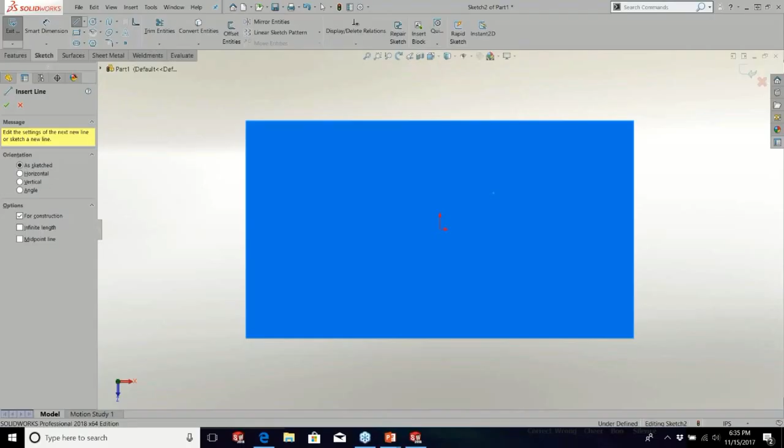A is for almost anything. And this one goes out to my group, SWOG1. All right, let's jump right in.

All right, very simple sketching, everybody should know this. About it, so I'm like, well, wait a minute, let's make sure that people know: the A key is an arc when you're sketching. Everybody should know that, but there's some that don't.

The A key is pretty versatile, that's not all it does. If you have selections that have multiple choices, the A key will toggle. If you look at the property manager, the A key will toggle through your options. So if you have a slot, you can toggle through all these. The other thing that I really like, because I like to focus on the pointer, is that the pointer icon updates to show which one you're looking at. So A is a command toggle.

Next one's going out, Swords for 200, Alex, that's S words. This one's going out to SolidFacts. They are actually the 3rd SolidWorks user group to hit the 20-year mark. They just did that not too long ago. Big ups to Duncan Gillis and all the guys down under.

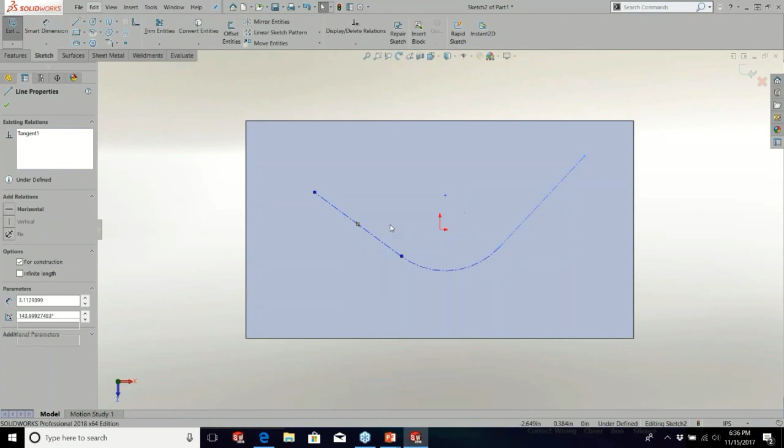Everybody should know about the S key pop-up. This is probably one of the best tools in my opinion. Let me knock this out. I add my extrude and my cut to the S key because that's usually how I exit a sketch.

Little bit of side trivia for you here: how do you turn an extrude into a cut? Grab it, watch the feature manager - turns into a cut, it's an extrude, it's a cut, it's an extrude.

Now the thing most people don't pay attention to with the S key - you hit the S key, you get the pop-up, but it also activates the command search. So you type in a command, it brings up that command. If you click right here, it'll take you right to the command. If you click on the eye, it will show you how to get to the command.

And this was something that I just found out last week, and I think he's there in Waltham - thank you, Kevin Burney. You can drag this over to your... no, Kevin told me something else, this was a Jim Wilkinson trick. You can drag this over to your toolbar and add it. If you want to know where it's at, the arrow moves over, does the fly out, goes to the command. When you just click your mouse, there it is. I'm going to keep moving fairly quick here.

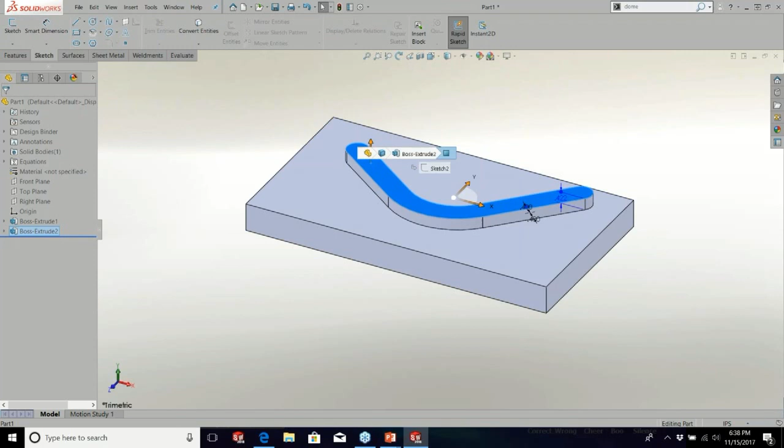All right, what does D do? Well, if you look up in the top left corner is breadcrumbs. Not your Hansel and Gretel breadcrumbs. These are powerful tools. When you hit D, it brings them right to your pointer. So your part, your body, your feature, you can edit your sketch. Everything you need is right there at your cursor. It also brings confirmation corner to your cursor. So if you think about it this way, it brings the top left of the screen and the top right of your screen to your cursor.

It's a very slick tool for a part, but it really takes on a new level when you open an assembly, because when you hit the D key in an assembly, it brings up the parts, but it also brings up the mates. So say you want to lock rotation on that, it's just a right click on the mate. You can make your change right there.

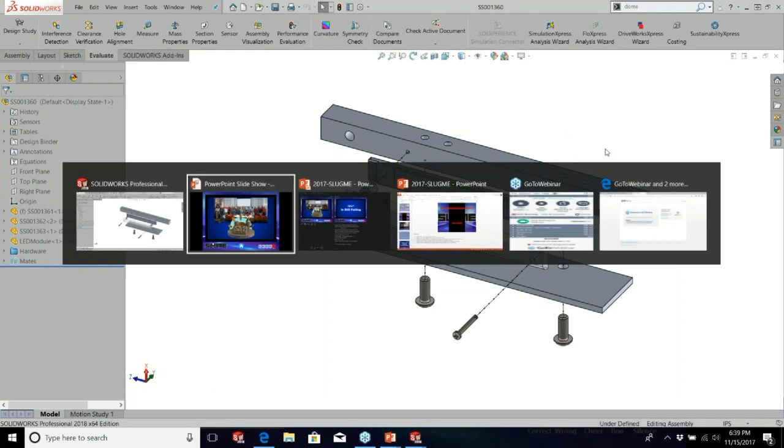Really quick shortcut. A lot of these came from when I'd be showing something else and people would always get hung up on the little things and say, hey, back up, how did you do that? Well, it was just something that I assumed everybody knew.

F also stands for frying, and what do we like to fry at SolidWorks? Bacon. This one goes out to James Adkins' group in North Carolina.

Now, James might think that he's getting a little bit ripped off here because the big thing with the F key is it zooms to full screen, which is cool, but that's not all it does. And this is kind of the bridge in this. It's like a bridge in a song. It'll take us to the next one.

Shift of control. Just really quick, Dan, do I have serious lag? No, you're pretty good here. Okay, perfect. Yeah, I just thought there was a little bit of delay.

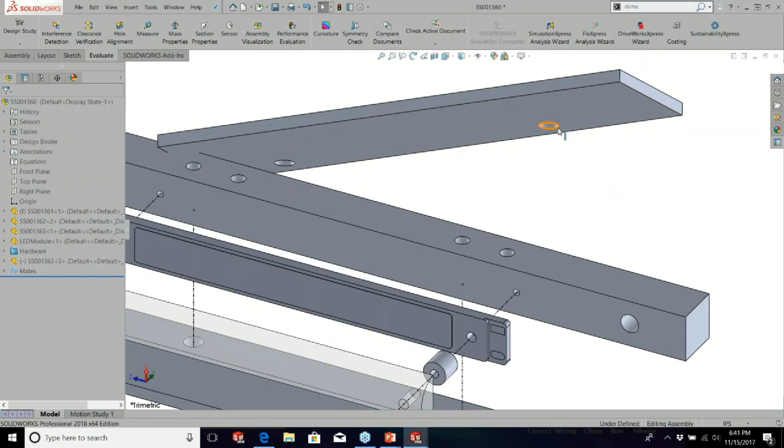And if you hold down Control and drag a part, most people should know this, but I still find people that don't, it copies the part. Right click to rotate it. Alt key enables your smart mates. Drop that in there. Alt key on this, drop that in there. I've copied a part and fully mated it with a couple of clicks and a couple of modifiers.

One of my favorites that I forgot about until I went to a rollout a couple of years ago, I thought this was the coolest thing and I didn't use it, so I forgot it. Tab key, when you're in an assembly, makes the parts go away so you can drill down to what you're working on. Now to bring it back, this is context sensitive, it depends on where your cursor's at. Shift tab brings it back. But if you don't know where they're at, Control Shift tab brings everything up, and you can just click on the part to bring it back.

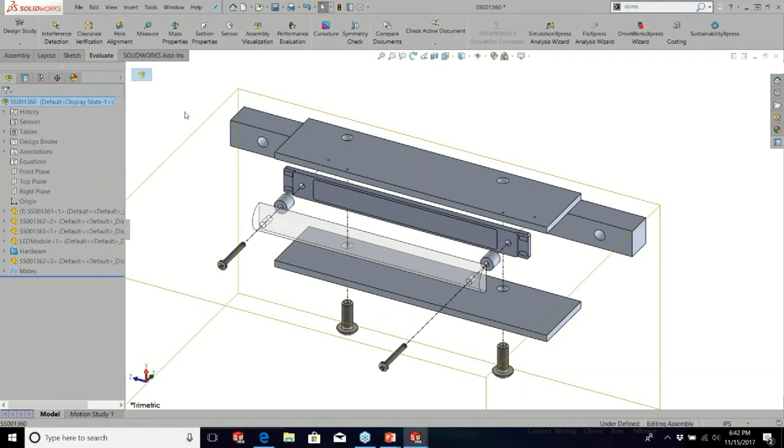So modifiers, Shift, Alt, Control, Tab, all of these. The C key, for example, very simple, but it's got a lot of power to it. If you ever have your feature manager tree blow out like this when you're working on something, Shift C collapses it, Control C copies, Alt C switches between construction geometry, Control Shift C copies appearance, and goes on and on. How do I know this? If you go to Customize and you go to Keyboard, you can show any key that has a keyboard or a search shortcut.

Pop to this top and sort them, and you can see all the modifiers in there: Control, Alt, Control Next, Control Shift. Just print it out, look at it, and then get in and start modifying it.

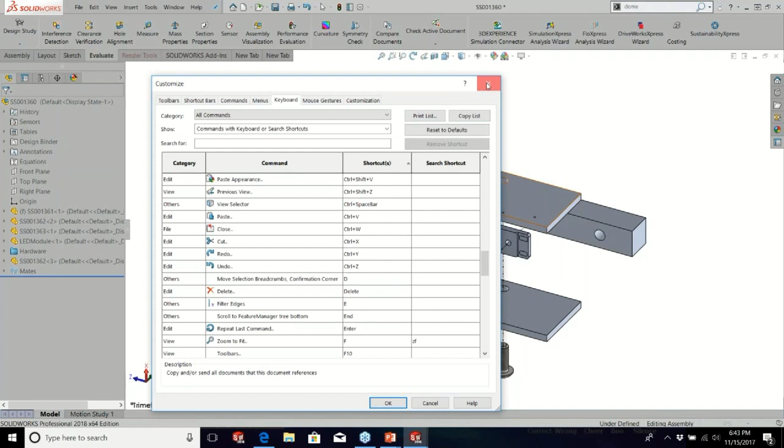I will leave you with this. Anytime I am ready to leave a part, I go through a couple of quick steps. Hold down the control key, hit 7, it zooms to full screen isometric. Hit B, that's a full rebuild, and hit S, that saves it. Just hold down Control, 7, B, S, and you're ready to exit out of the part.

Which is what I'm going to do. I'm not going to save it. And we're going to jump back. Okay.

Back to the top of the board. Totally tubular - this is a little bit manufacturing, a little bit tips. Are you going to use a saw to cut that tube? This one's going out to Sean Casebolt at the Central Texas user group. Just going to take a quick look at making a tube.

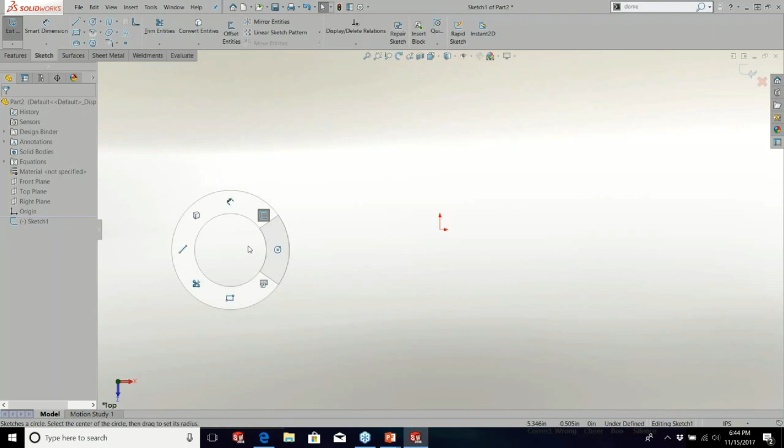For this one, I'm going to change it up a little bit. Last one I was using a lot of keyboard shortcuts, this time I'm going to use some gestures. If you're not using gestures, right click, drag your mouse, and when you swipe through it, it engages that command. Once you get used to it, it goes very quick and you won't see what's going on. So swipe over, I'm in a circle. Swipe up, I'm grabbing a dimension. And you can add your shortcut key to it.

That's something I do without thinking - if you hold down your control key and drag your middle mouse, you can pan while you're in the middle of a command. I'm going to do a thin feature, flip it, call it good. Now I'm going to do the cut.

I'm just going to do a quick sketch of a line through here. Little reminder, a lot of people forget this: when you click and drag and release, it just draws a single line segment. Hit D to exit the sketch. If you have your mouse up in the top, rolling the mouse will run you through the tabs.

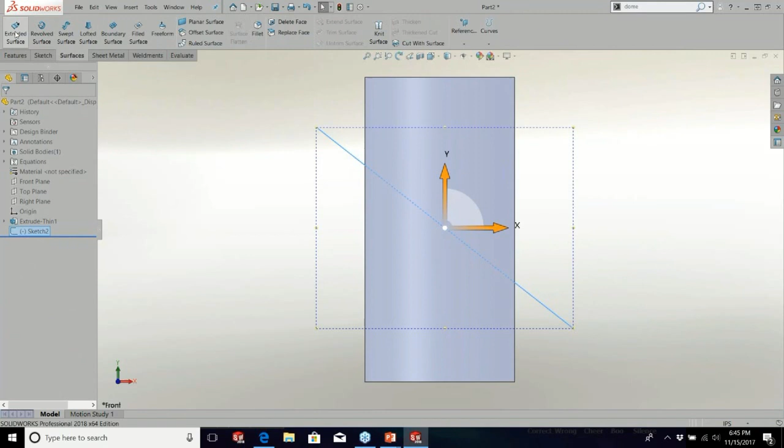So I'm just going to do a quick extruded surface, mid-plane, drag it out, right click, it's good. Cut with surface, grab that, right click, click on the surface, hide it.

I really try to get people to pay attention to the cursor because there's so much that goes on there. So just watch your cursor - there's a lot of tools. This is what we'd expect: when you saw cut something, it cuts straight through it.

Why do I bring all this up? What if you want to cut it with a laser? This one's going out to Travis and Brian down at the Slug in Louisville. If I want to turn this into a quick laser part, what I can do...

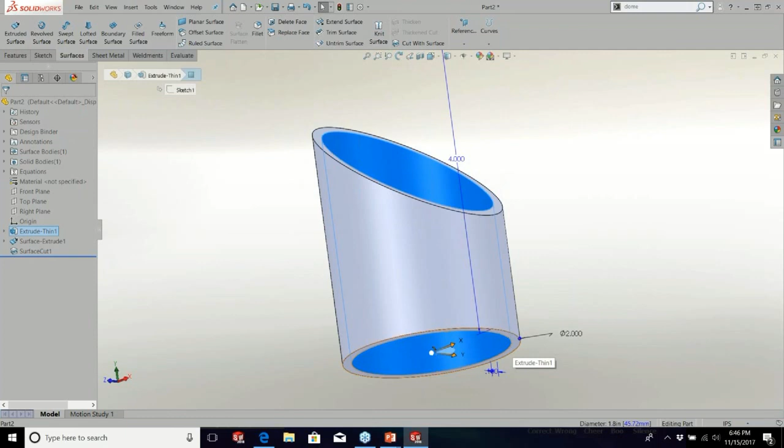Is just grab these faces. I'm going to delete the faces, hit the D key for OK. I'm going to thicken it - when it thickens normal to it.

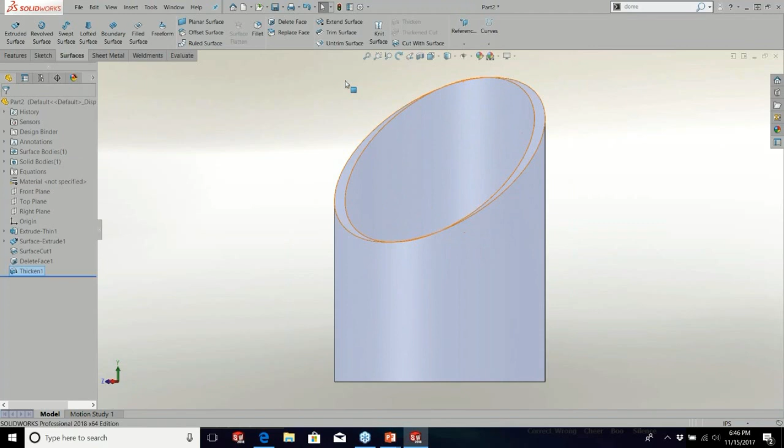So this is how a laser cuts a tube. It just cuts through one side and then the tube rotates, so you're always going to get that flat edge there. You wouldn't cut something like this on a laser, that'd just be cut on a saw, but you would cut something like this on a laser because there's no way you could cut that on a saw.

And if you're really smart, you can nest them together really nice - something you can't do with a saw.

That's a wrapped cut. How did I get the text to wrap around that cut? I used wrapped cut. This one's going out to our neighbor Jacob Huckins up with the Omaha user group. Let's take a look at wrapping this tube.

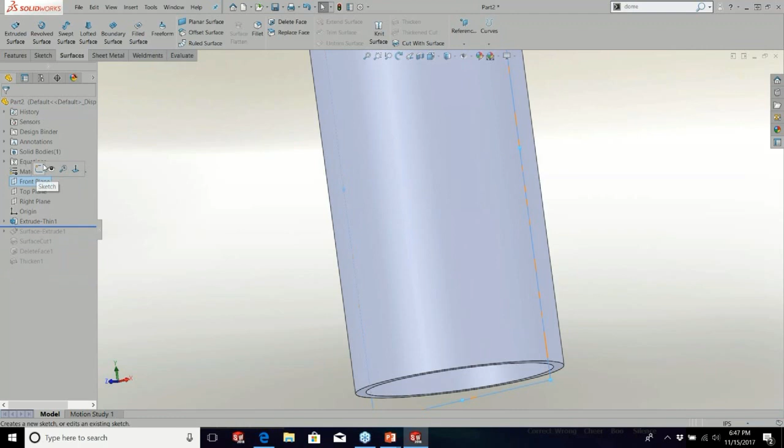Just going to do a slot and wrap it around this face. This is what it would look like if it was cut on a laser - all the edges are normal to the tube, and it looks really good.

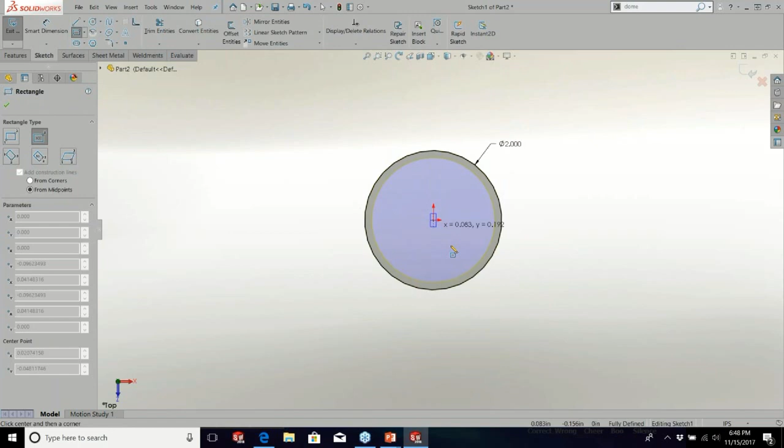First thing somebody asked me about this - oh, could we cut a square tube? Okay, I'm just going to use my breadcrumbs to edit the sketch. Draw a square, I'm going to bring it in. I'm going to take this and turn it into construction, because that way I can still use the 2 to drive the size of the square without having to add any other dimensions.

Throw some fillets on this. Say, yes, I know.

Jump out of the sketch. Now I get an error because it lost the face, since I used a different face to create that. So all I have to do is modify my wrap and pick the face, and this is what it used to look like, because it just cuts that one face. They did something really great last year.

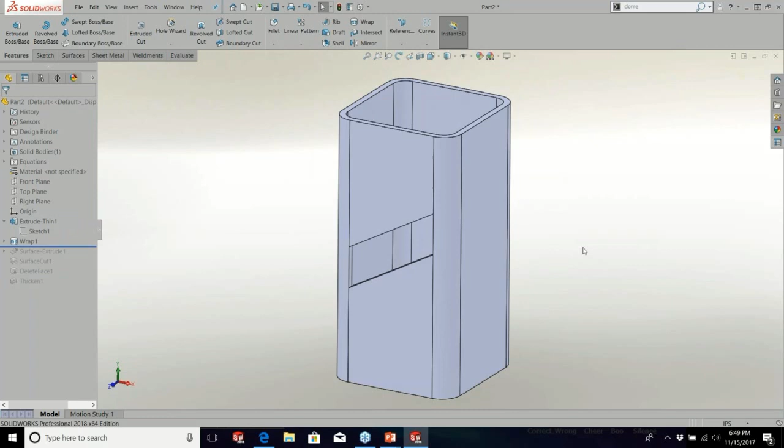You can now wrap it around a spline surface. So I can come down here, select tangency, let it wrap around, and now I've cut it. This kind of took away one of my favorite little tricks, but I'm going to show you anyway because I still really like it.

If you select that chain and do a fit spline, it'll wrap that into a single surface. You get the same message, but when you come back here, pick the surface, and it wraps it. You don't have to worry about doing it that way anymore, but I wanted to show it because it's kind of cool.

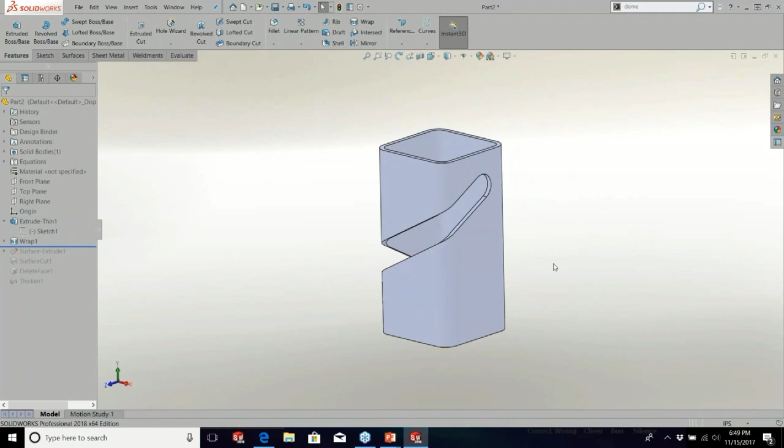All right, now we're going to flex those pipes.

This one's going out to David Antanavigi from Long Island. I joke because I had to ask him how to say his name, and he said it doesn't really matter, so I'm just going to have fun with it.

When you have a tubing laser, people want to push it to its limits, and you end up coming up with some really interesting stuff. This is something that I did on our tube laser. It's a tape cutter — you put the tape on here, it runs through the windshield and cuts on the grill.

This is what it looks like coming off of the laser, because it was just a 1x3 steel tube. And then this is what it looks like folded up, because we can set it so we can fold it after it comes off the laser. How do we do that?

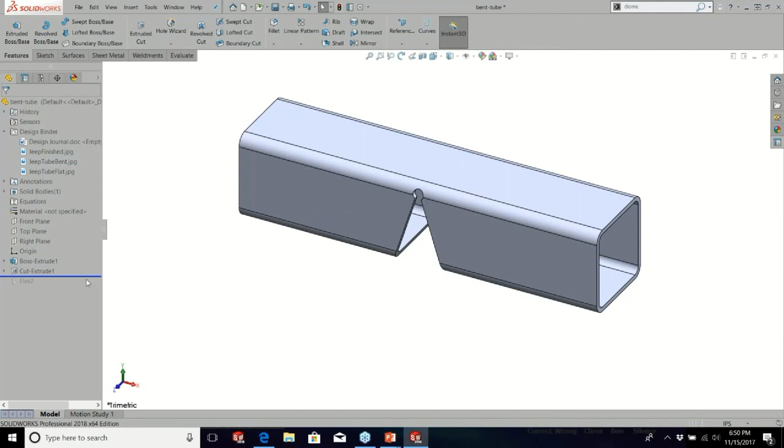Well, I drop in a cut, and then I use the flex tool to set the plane, set the angle, and bend it. I'm not going to go into this—there's a whole lot to it, but dig into the flex tool: bending, twisting, tapering, stretching, all kinds of fun. Like I said, I'm just throwing out ideas. I figure if you know that something's possible, it makes it that much easier.

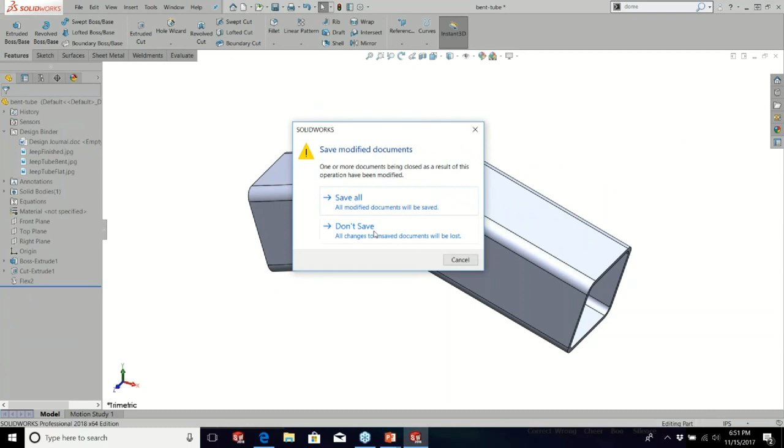Bending a sheet metal tube. This one's going out to the Aberdeen Proving Grounds, Cameron Smith.

This was a way that I kind of cheated the system. We had a tube that had notches, and what we were going to do is cut it and bend it and then weld it, and the notches are basically just alignment. Well, how did I do it? I went to my sheet metal tools, and you'll notice that I left a little gap. This is how you usually make a sheet metal tube.

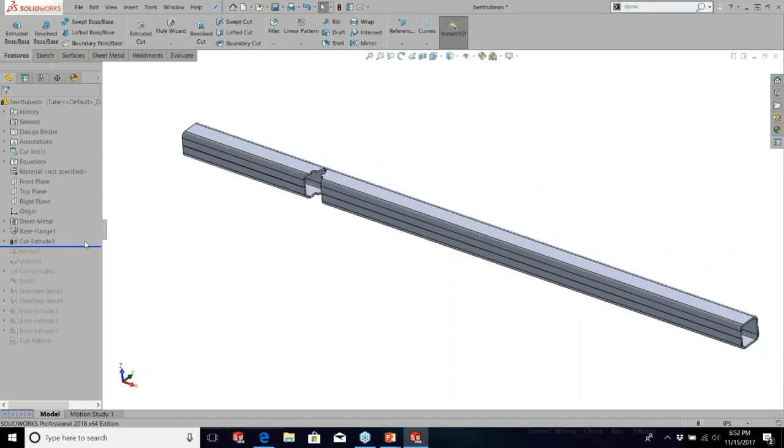Leave a little gap and it's fine. So I do a simple cut, mirror it over. I unfolded it so that I could add some reliefs — you can look in here and see the reliefs. I use the sheet metal tools to fold it back up, and then I call on my sketched bend, bring in that side, bring in that side. So it's still a sheet metal part, but then I close the gap by doing a simple little extrude.

So I get a cosmetic part. I can't flatten this anymore because I've completed the loop, but that's what configurations are for. You roll those back and you've got a flattenable part. All right.

Let's go to 'that's exactly what I weld meant.' You mean there's more? I actually saw this one on the forums the other day, and I was surprised that somebody didn't know this, but people come into it at different times. So this is why I have this, in case you forgot about something or didn't know it. This one's going out to Dan Riffle, excuse me, and Kathy Ross with the Colorado SWUG.

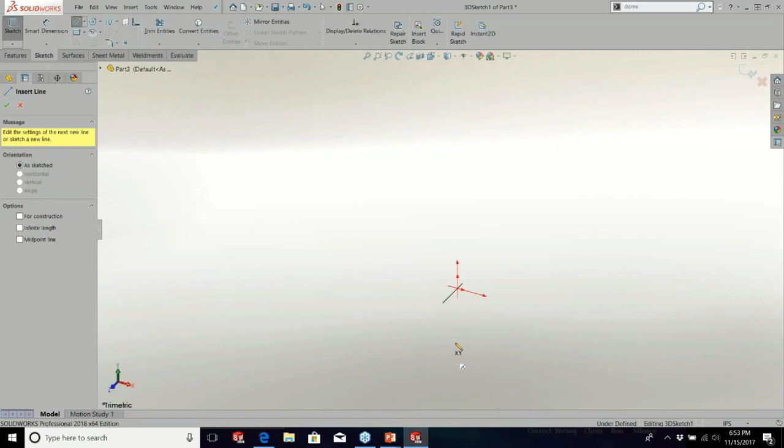I'm just going to start a new part, and I'll do a weldment sketch. I'm just going to draw a long line. Jump out of the sketch. I'm ready to add a structural member.

Now, when you install SolidWorks, you'll get about a half a dozen profiles. Each of them has different configurations and sizes, but who wouldn't want to have this many choices? You do, you just have to go get them.

So here's where you get them. Come over to your design library, SolidWorks content, pop down to weldments. Any one of these, you just hover over it, control click, it downloads a zip file, and now all of a sudden you have all of those special weldments.

What if you need a new profile? What if there's one that's not in there? Well, this one's for Tony Cantrell down in the Palmetto SWUG in South Carolina. I should probably visit him next time I visit my folks.

All right, I went online and found a nice profile that I want to use, but it was an AutoCAD file. I could just open up the DXF DWG. Here's that file. I'm going to make a weldment out of this. It's just a piece of crown molding.

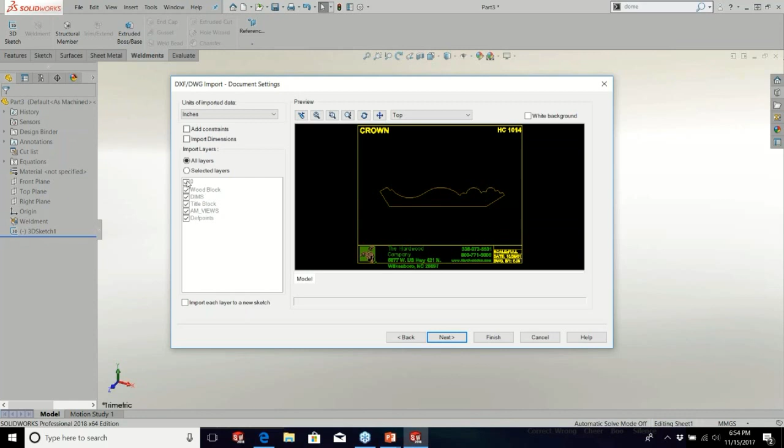First thing I'm going to do is get rid of all the extra stuff. I'm really just after this right here. Now, I did kind of cheat and peek ahead and saw that they didn't do a very good job when they drew this, so I'm going to clean up some of the gap by increasing the distance. That'll help close in where they weren't paying too close attention.

All right, here's my profile. Now to set it up for my weldment, first thing I'm going to do is select those two. When you select point, it'll give you the apparent intersection. I'm hoping everybody knows that. If you don't, you do now, you will use it. I'm going to turn this into a block, and the reason I put that intersection there is I'm going to use that as my insertion point.

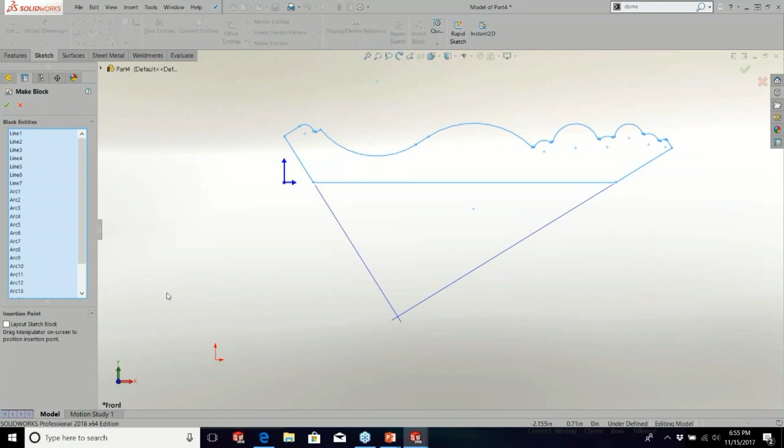Block is done. Now just to throw everybody off, I'm going to delete it because I want to bring it in and put it at the origin. And then I'm going to spin it around so it looks good. Give this a horizontal relation.

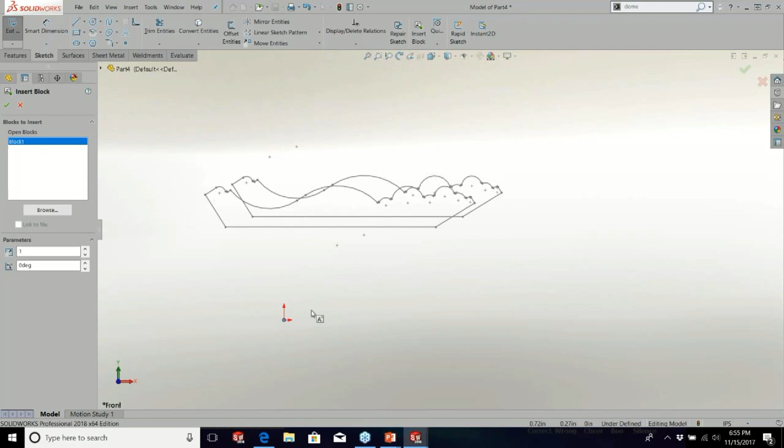And just to really mess with everybody, I'm going to explode this block. And then I'm going to come in and fix everything. There's my sketch. I'm going to close out of it. That has all the information I need. My insertion point for the block, everything's defined.

Click on the sketch. This is very important, and a lot of people don't realize this. Click on the sketch, save as, change your file type to a library feature part, drill down to your weldment profiles, and this is going to be a HC1014. Save it. When I see the little L on my sketch, I know that it's set up correctly.

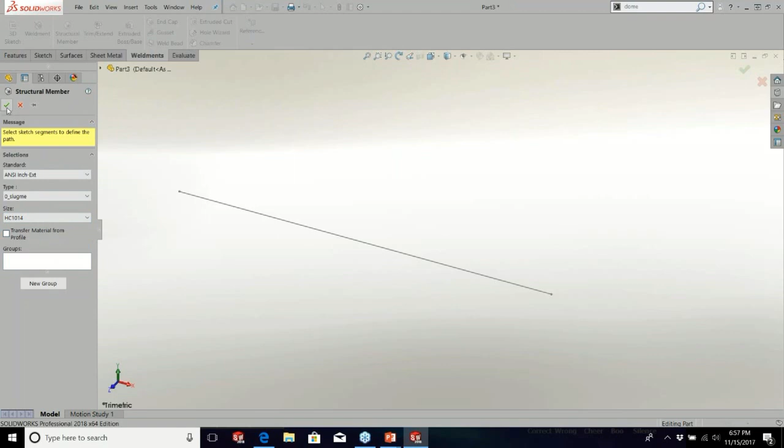Close out of that. This is my other part that I was working on. I can just go grab that one that I just made, and put it to that. And now I have some crown molding as a weldment profile.

Now, let's expand on that. Carpenter, we have the trim. We're going to add it to something.

This one's going out to Nicole Walden with the Chattanooga SWUG group. Nicole plays a major role with the user group leaders at SolidWorks World. She helps set up the get-together. She helps everybody line up hotels. She won the User Group Leader of the Year award a couple years ago. If you don't know her, make it a point to meet her.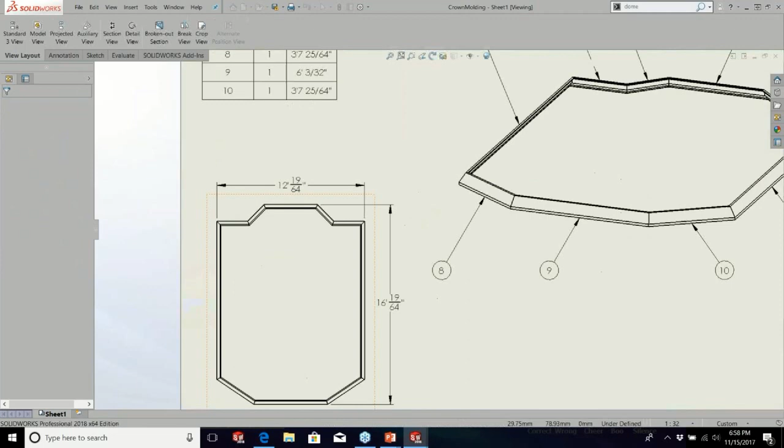I've got a room. I took my floor plan and I put in crown molding. So now I can see how everything's going to look if I go over and open my drawing. Here's my room size, and here are my piece sizes, so I know what I need to cut.

Not going to belabor it. I'm just showing you cool stuff that you should know about.

This is probably one of my favorite ones tonight, and I can't take any claim for it. When you work in weldments, you're generally working with 3D sketches. Last year, I found the best way to create a 3D sketch really quickly, and I owe all of that to Sal Lama. This one's going out to Kim Olson with the Kettle Moraine SWUG, and this was just the coolest thing. I talk about it an awful lot.

So, start a new part, and I'm not even going to worry about starting my weldment yet. I'm just going to start sketching, and let's do a weldment of the SolidWorks part model, and we'll do it in 3D just to make it really awesome. And I'm just really rough sketching right now.

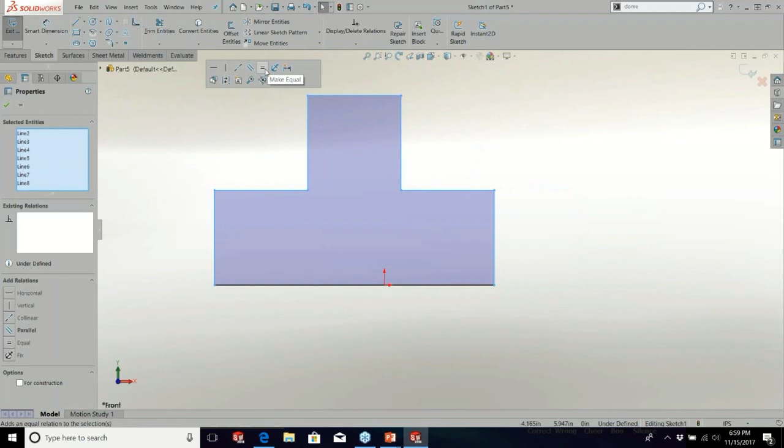So I've got this. I'm going to make all of those equal. Put that in the midpoint. And I'm going to give this a dimension, so we have a fully defined sketch.

Going to extrude it, mid-plane. I'm going to build some intelligence into this and say equals this dimension right here. Still haven't done anything with a 3D sketch yet.

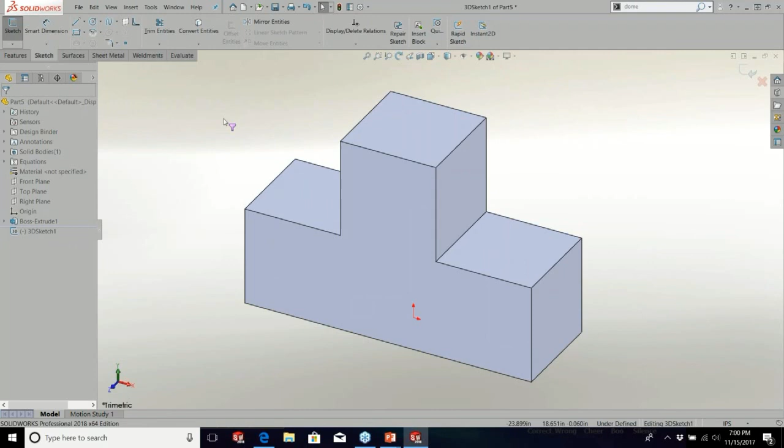That happens now. Turn on your edge filter, window select this, make sure you have all of your edges, do a convert entities, and now when you hide the body, you have a really nice 3D sketch of your part that can be easily changed just by editing your body.

This would take forever to draw if you did it the standard 3D sketch way, so I'm a huge fan of that. Try it out, really powerful.

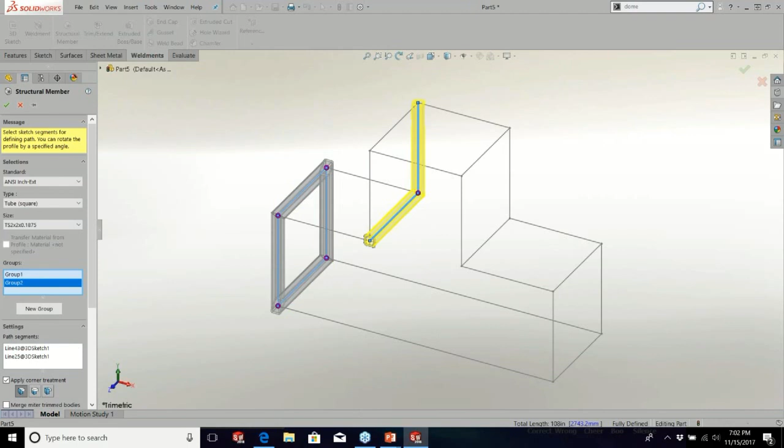We made that SolidWorks part. We might as well make a weldment out of it. This one's going out to Jeff Holiday with Marisug. Let's just go ahead and say weldment, we're going to add structural member. I'm not going to use the crown molding, I'm just going to do some standard tubing. Right click, create a new group. There's a really good discussion on this on the forums the other day, people comparing processing time and rebuild time depending on how you build it. I like to do it like this, where they're all new groups within a single feature. To me, it just makes sense and it goes really quick.

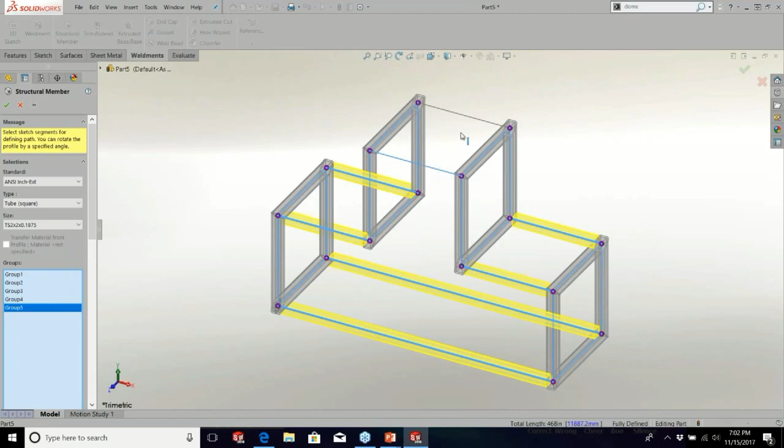My weldment's done, I've got one feature. I'm going to hide my sketch, come up to my cut list, and I'm going to update it. In this entire assembly, I have 3 different size pieces. And if I click on that original 3D piece, everything updates. I didn't think I would ever be able to model a weldment that quick. It's a really handy technique.

All right, let's keep moving. Odds and ends, this is kind of oddball stuff that I think is interesting. Hopefully you will too. Using SolidWorks to tutor math, this is just giving somebody an idea of how something works, because we all know SolidWorks is math and geometry. This one's going out to our buddy John Matrician with the Western Mass SWUG, one of the Bacon Brotherhood guys.

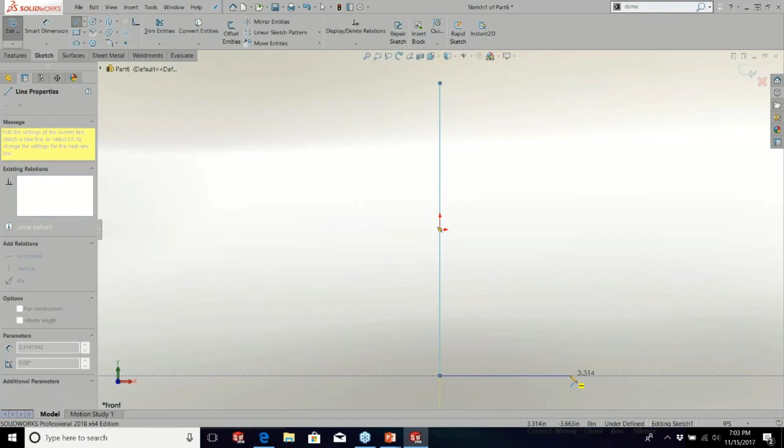All right, let's start a new part. This one's really quick, and you'll be surprised how quick you could show somebody a complex math theory. I really like the midpoint line. We're not going to do Laplace transforms or anything like that, we're going to keep it simple.

Today we're going to talk about conic sections. Most people here should know about it, but if anybody's ever asked you, or if your kids start learning about it, this is a really good way to give them a good understanding, because this is all it is. Conic sections, we have a pair of cones here. A conic section is how a plane slices through a cone. So there's your circle.

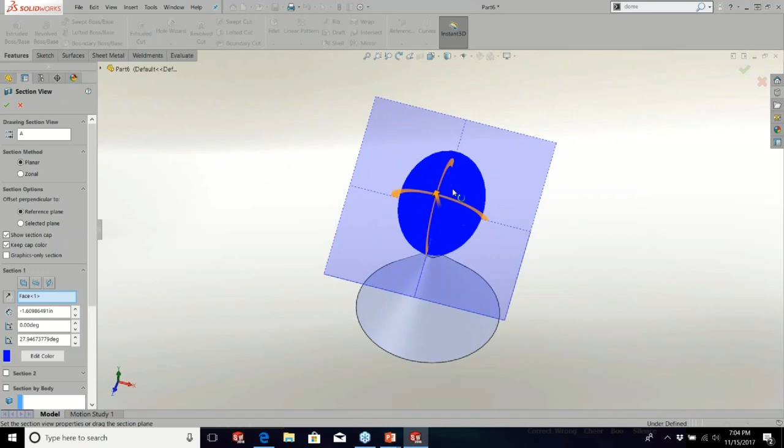Angle it a little bit, bring her down, angle a little bit more. That's an ellipse. Bring it up a little bit. There is a parabola, and if we pop over here, we can finish on a high note with a hyperbola. Now you understand conic sections. Sorry, I'm a math geek.

All right, combine, not just for plowing fields. This one's going out to David Smith with Central Ohio SWUG. Now, if anybody's ever gotten something like this, let's go to design binder. I've been cheating, I've been throwing a lot of stuff in the design binder just to show quick pictures. It's a good place to store information. Check out the design binder.

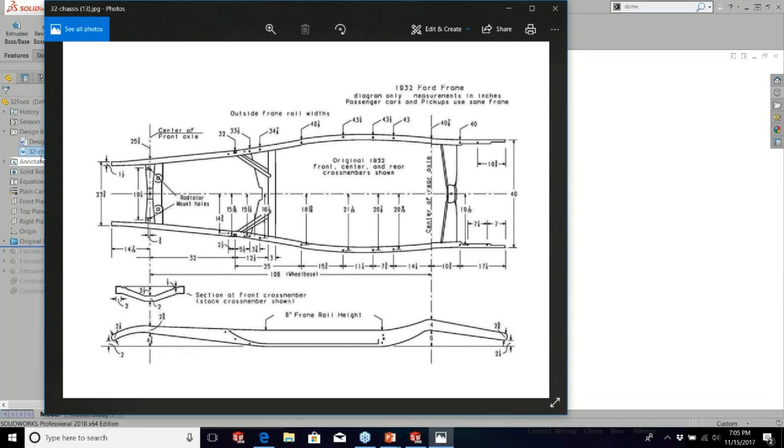Somebody gives you a drawing like this. It has most of the information you need, but it's a fairly complex shape. I'll show you a really easy way to make it. Sketch pictures, if you haven't looked at it, look it up. You can put a JPEG or a bitmap into a sketch and use that as a picture. So what I did is I just took that, broke it into 2. I have my top view and I have my front view, lined them up, and now I can basically trace.

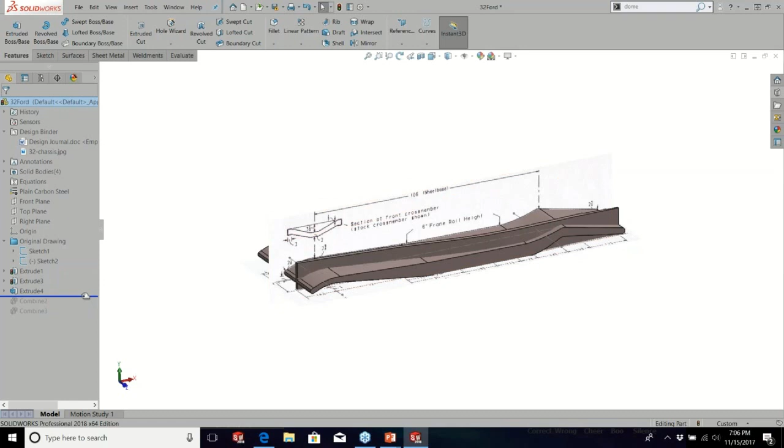So there's the top view. Then I dropped in the sides, and then I used the combine tool to only show where they intersect. So there's a trace, there's a trace. Hide these sketches. Pretty complex bit of geometry, and it was really easy.

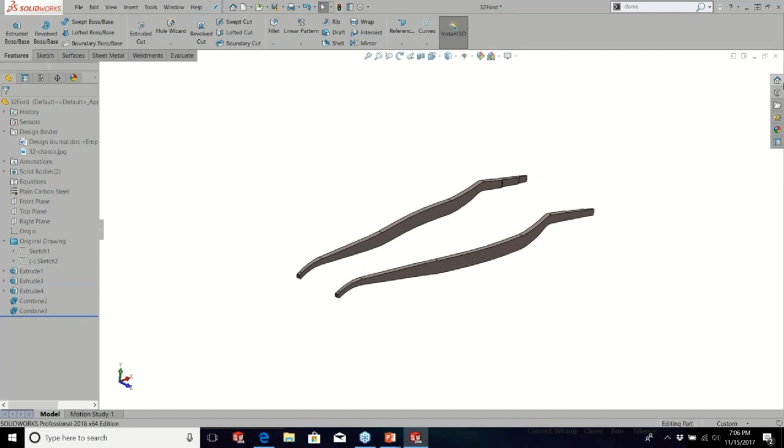All right, multi-body makes it happen. That's how I did that, that was multiple bodies, and I used the combine tool to bring them all together. This one takes another look at it. This one's going out to Peggy France with the Northern Indiana SWUG. We're big fans of Peggy, we really like her. She's one of the first people we see on the way to World.

All right, this was something that I did for a friend of mine. Once again, design binder. It's a pair of bar ends for a bicycle, caps the ends where your grips are. It's a turned aluminum part, but he wanted this to be machined with a ball end mill. There's a lot of different ways to show it. Here's what I chose, there's my revolve. I created this geometry. Right now it's a multi-body, so I'm going to go ahead and hide this.

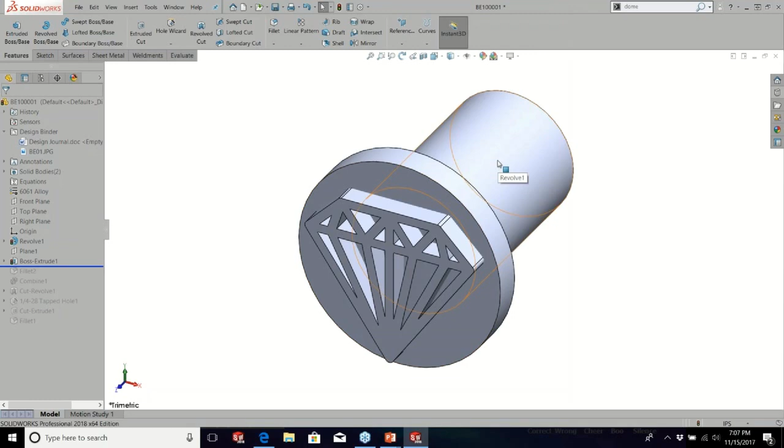That's just a simple extrude. I come in with a fillet. It's really easy to fillet when you have something like that. I do a combine, spin it around. That's basically what the end mill would cut out. Roll it to the end. There's the finished product. Just throwing out quick ideas here, hoping to get the gears turning. It's a lot of stuff that I think people should know.

You really think that will bend? This was something that when I was starting to learn about sheet metal, I heard from the press brake operators a lot. They don't hold back. They tell you how it is.

Now, the quickest way for me to learn was to model our tooling. So I have top and bottom, and I can drop the part in. Where this saves you is when you draw a part like this and you can see that it's about to hit the tooling. Right about here is where it crashes, and this is why the guy comes screaming at you.

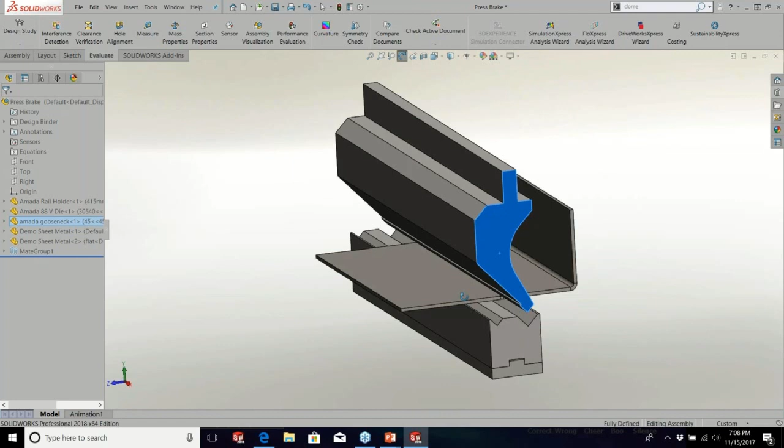So you don't need to do something flexible like this. This was something really great that Gerald Davis from Colorado did. He was a user group leader. He put it on the forums. It's probably 6-7 years old, but it's still valuable. You don't need to make it flex like this. He did some custom stuff.

All I had was the top and the bottom, and I could just mate my piece into it and see if it was going to crash. Save yourself some grief. Don't do like I did and learn the hard way.

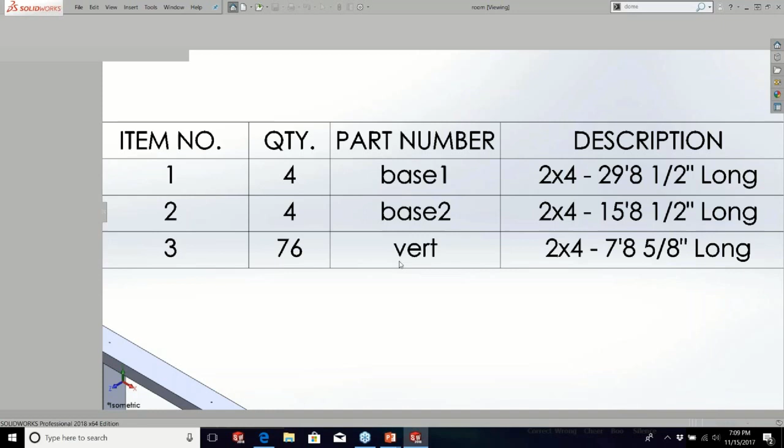Zoomed in on a bill of materials here. This shows a couple things I'm going to hit on a little bit later, but it's basically just, we need 4 of these, 76 of these. It's 2x4s, these are the lengths. What is it? It's a big room. When you build with 2x4s, you want 16 on center spacing. And if you want to do it really smart, you want it to update as you make changes.

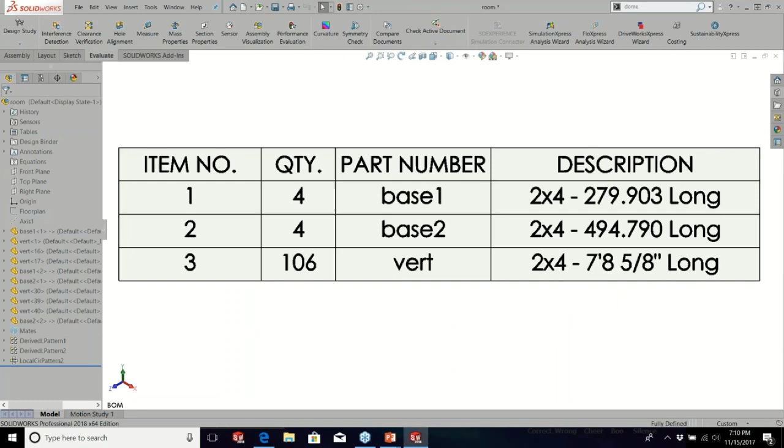So how do you do that? As soon as I rebuild, I get the updated lengths and totals.

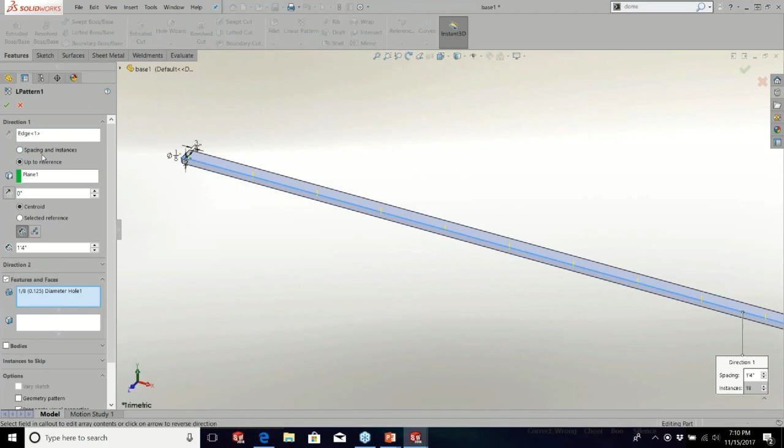Let's take a look at what I did. So here's my base part, and what I did is I just drilled a small hole to represent where the 2x4s will go. Did a pattern, and instead of doing spacing and instances like you normally do, up to reference, you specify a plane, and then you give your spacing. So 1 foot 4 inches is 16 on center. So my plane on this one is a little bit offset so that I could do this little trick here. You'll notice that I have a couple staggered here at the end. The reason I do that is because the drywall guys like it when you have a piece there in the corner so they can hang drywall right.

So linear pattern, look into that, big time saver, and it looks really cool.

I never met a metadata I didn't like. I could go on for days about this. This is where we get into custom properties. That's what metadata is. I am a huge proponent because it's time savings. Do you really want to type all of that? Do you want to do it every time?

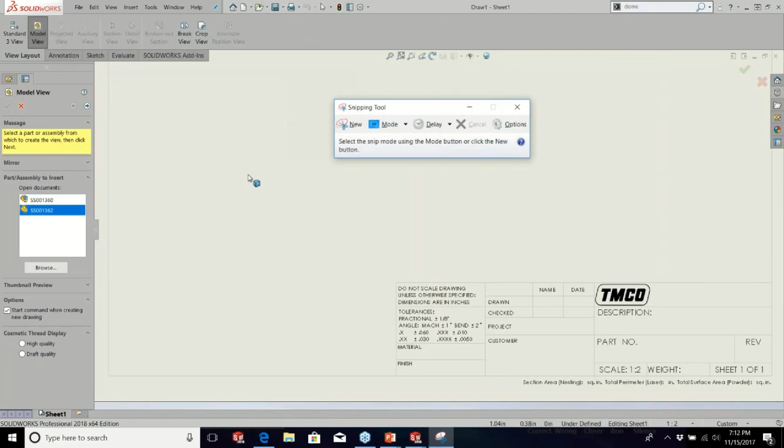So I'm going to bring this back up, open up this part, and I'm going to start a new drawing, just a sheet metal drawing. And what I want to show is what we have right here, right now. Title block, fairly empty. I'm going to grab a copy of that just so that we have it for comparison. Come on.

I've completely lost my mouse. All right. I'm going to jump back into SolidWorks. Now I'm going to bring in that part. So here's my part. Watch what happens to the title block.

This is how it should happen every time. I've barely scratched the surface of what you can do with custom properties. But just to show you what I did, here's the before, here's the after.

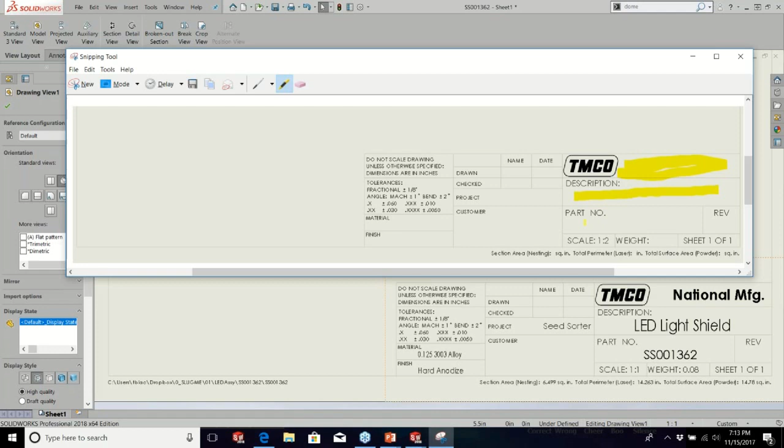Brought in the department, brought in the part description, brought in the part number, brought in the part weight. I brought in the project. I brought in the type of material. I brought in the material thickness. I brought in the surface finish. I know where the part is stored.

Come down here, section area. We use this for calculating our nesting area. This is how much space it takes up on a sheet. This is total perimeter, this is what the laser will cut. We figure inches per second, that's how we figure that. Total surface area of the part. This is how we figure out how much powder we're going to use if we're going to powder coat the part. All of that came in just by dropping in the part with the metadata.

I don't mean to sound preachy, but you should be doing this. I should be doing more with it.

And I'm going to continue my rant. How do you keep tabs on your properties? SolidWorks makes it really easy to put this information in.

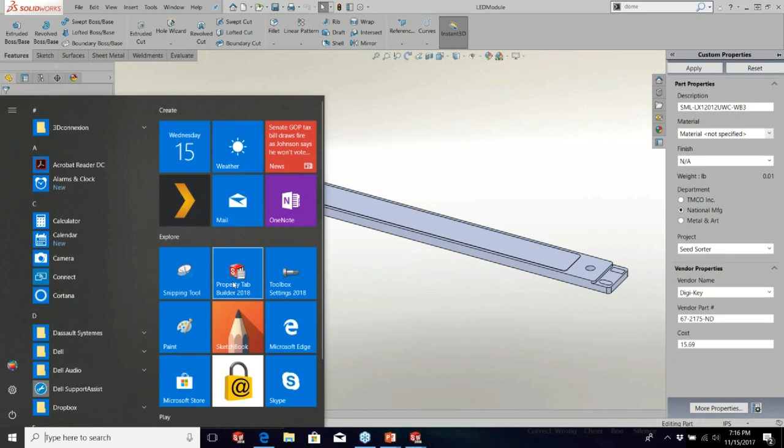So here's my custom properties, here's where it came from. Property tab builder, I have it here because it's a shortcut. It's under your SolidWorks tools. So you go start SolidWorks, SolidWorks tools, property tab builder.

This is what it looks like. On the left, these are all of your tools. This is where you build, you just drag them into this. And then this is where you customize.

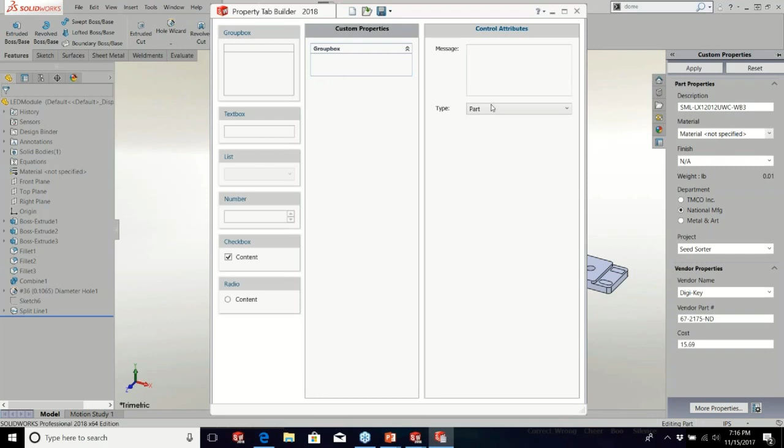So to give you an idea, I'm just going to pull up what we're looking at over here. So I drag these over here. Like this here, department, I drag radio over. When I click on that, I get department. I can specify the number, define them, give a value. This is where I tell it what to show when I select that value. If I go down to vendor, it's just calling on a text file.

There is so much you can do with it. This is just a drop in the bucket. Dig in, play around with it. It will save you so much time.

All right. Manipulating metadata. Now that we have all these custom properties in, we've got the custom property tab builder, we're throwing it in, what do we do with it?

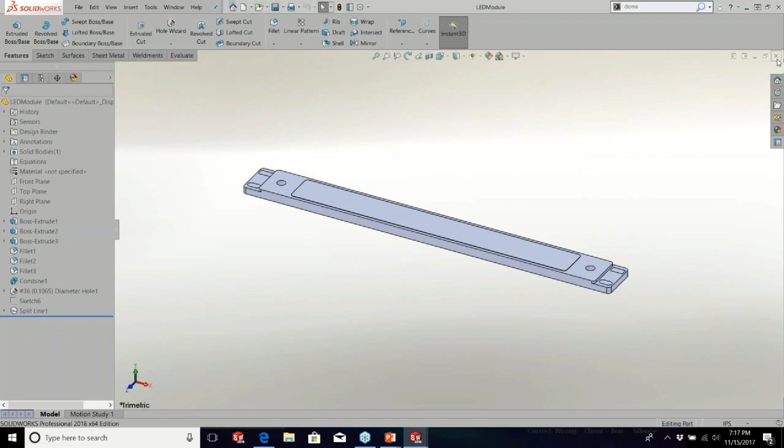So here is a small assembly, and where custom properties really come in is like in a bill of materials. I have a couple different ones that I use. The standard one that goes on in drawings will be item number, quantity, part, description. But I have another one that includes vendor, vendor number, cost. And because I have cost and I have quantity, I can create another column for totals, so I can have these multiply out, and then I can do a total cost and have it sum it at the bottom. And then I can just jump in, take a look at this, see how much this subassembly would cost.

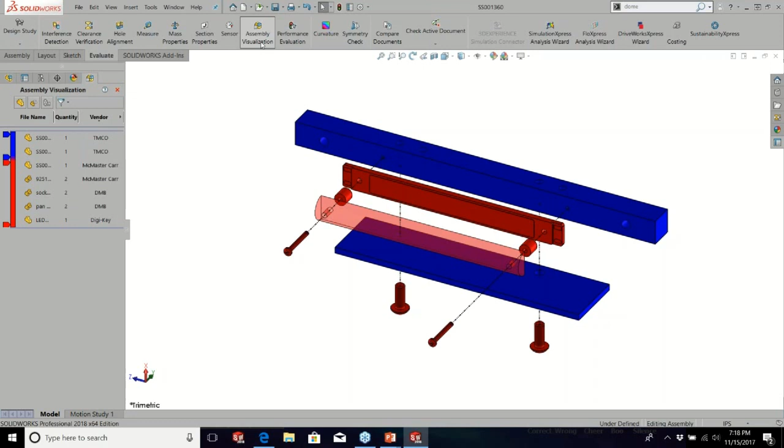Another cool thing you can do with this, assembly visualization. You can call on custom properties. Normally I'll do weight if I'm looking to reduce weight, or I'll do cost if I'm looking to reduce cost. For this one, just to give you a quick glimpse, red and blue: if it's blue, we make it, if it's red, we buy it. There's a ton of stuff you can do, not even going to touch on half of it.

All right, custom properties. At some point, you have to type in some of that. I typed in the number for the part. If I didn't have it in a pull down, I'd have to type it. There are ways to avoid that.

We're going to do these for Tom Cody and Glenn LePage with the Central Mass swag. I'm not hearing any cheering, Dan. Now, go. Go. Woo. All right. Wow, my group makes noise.

If I start a new part, I have several different templates. One of the nice things you can do, if it's a common shape or common part, these are just a bunch of simple extrusions that have a family of shapes, T-shape, U-shape, L's. I put the sketch in there so I can just start a new part.

It's got the sketch, I extrude it, and it has configuration so I can change the size of it. Or if I have an 80/20 part, there's my sketch. I come into it, I hit extrude, go mid-plane.

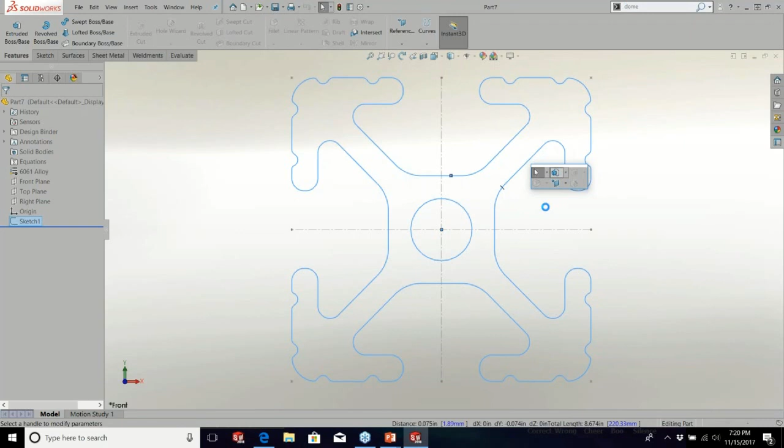Now I have a fairly complex part really quick. I just did an extrude. But the nice part is I didn't have to type anything because I put it in the template. So I have a description for the bill of material. The material's already been assigned. The finish has already been assigned. I could change it if I wanted to put it on a certain machine, but my vendor information's already there. Everything's already in place, and I didn't have to type anything. So save yourself some time that way.

All right, we've got about 10 minutes left, just enough time to draw me a bath. Funny story here, and I'm going to make it up on the fly. Jade had a rough day at work and called me and said, 'Honey, can you draw me a bath?' She was not impressed when she got home and the bathtub was empty, but I had a really cool rendering.

Rub-a-dub-dub, let's model a tub. This one's going out to Carl Gauger with the KC user group, also one of my favorite user groups. Well, they all are. We're going to start a part from scratch.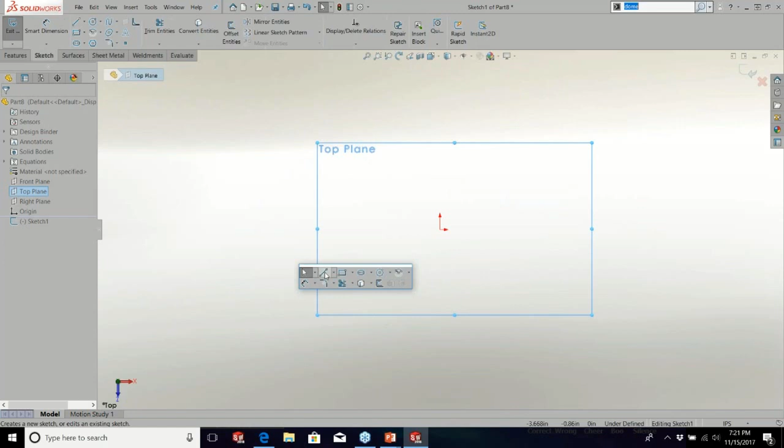Depending on the type of tub you want, you can do it with just a slot. Give it some dimensions. Everybody should know holding down the shift key to grab the outside of the circle. And we'll extrude it. That looks like a pretty comfy tub, right? Anyone? No, I would not want to sit in that tub.

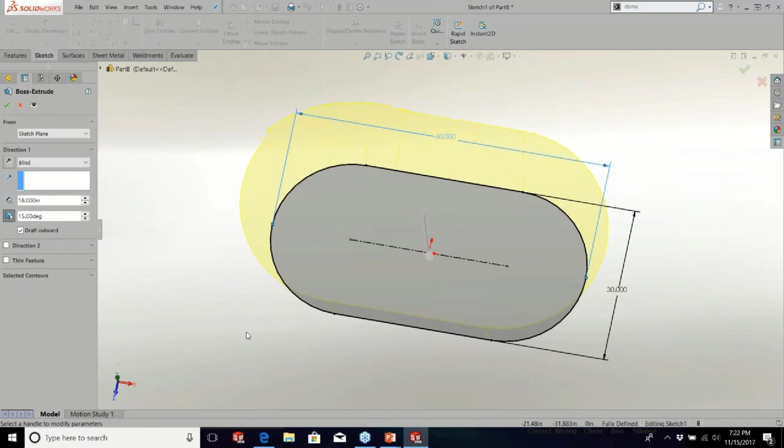Let's add some draft to it. Okay, now it's just a cruel joke. Flip the draft. That looks good. The only problem here is we've blown outside of our area. So if you're pulling out a tub and you have 30 by 60, it's not going to fit unless you do some creative work with the wall.

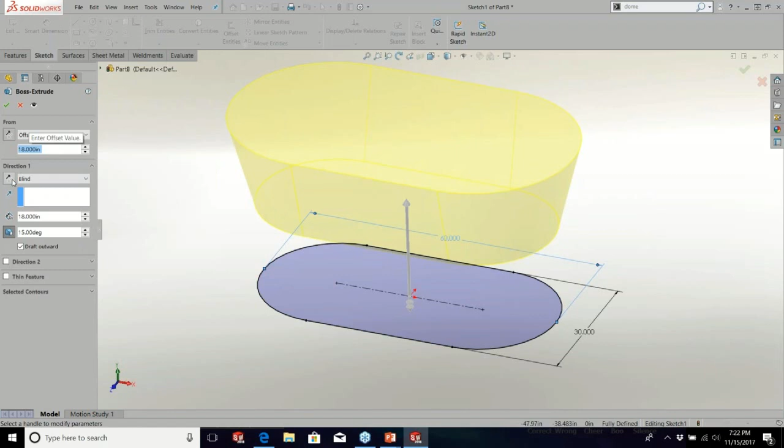So what I'm going to do, a lot of people forget about this one. You can sketch on a plane and start your extrude elsewhere. So I'm just going to offset it and start at 18 inches up. I don't want my tub to float, so I'm going to flip my extrude direction. And now we're back to the goofy, so I'm going to flip that. That looks a little bit better. It fits in the space. We have the nice taper to it.

I am going to put in a little bit of intelligence because right now we have it set to blind. I'm going to go up to the top plane, which would be the floor, for this, so that if I change this, it adjusts.

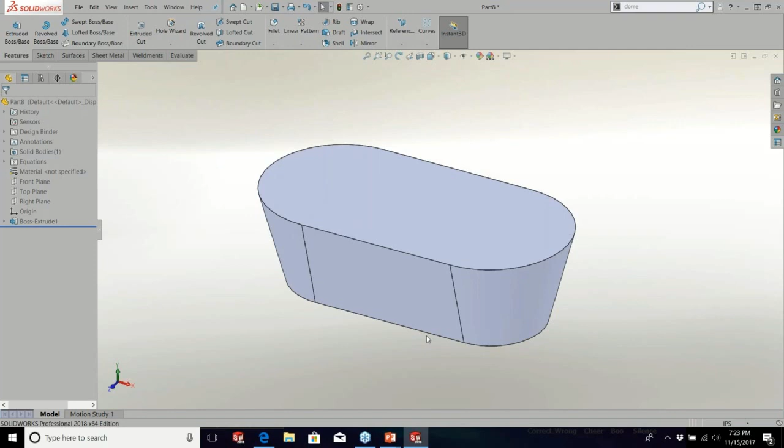Now, this is why I really push people to pay attention to their cursor. There's so much you can do with barely moving it. I'm going to click right here. There's my pop-up, select other. I'm going to click right here, get the bottom. Do you want to do a fillet? Yes, I do. Key in a value. Right click because it has the right click. And I've done all that with very little mouse movement.

Same thing here, select the surface, hit shell, key in a value. If I drag this down just a little bit, I'm in right click mode. We've modeled a tub.

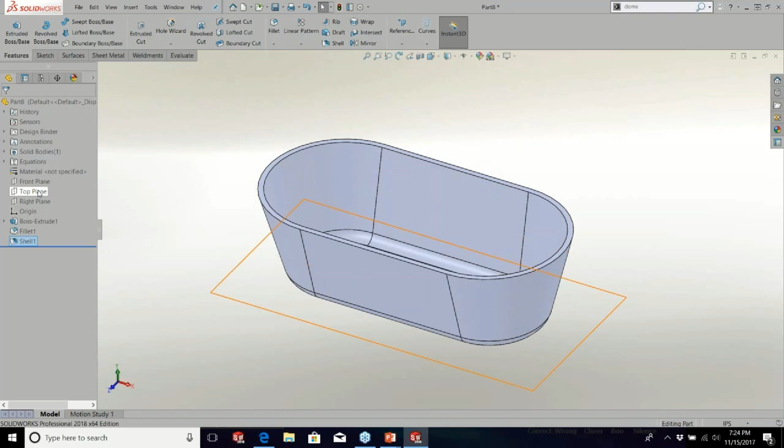What do we got to do? We got to fill it. So we're going to fill it for Peter Fisher with the Central Indiana user group. A really cool way to do this: if you remember me talking about all the little keyboard shortcuts, holding control copies, it works for planes as well. So this plane is going to be my water fill line, if you will.

I'm going to use the intersect command to chop this with my plane. Right click, now it's got water in it. The one thing I'm going to do is uncheck merge results because what I want to do is have 3 bodies. So this right here is my water.

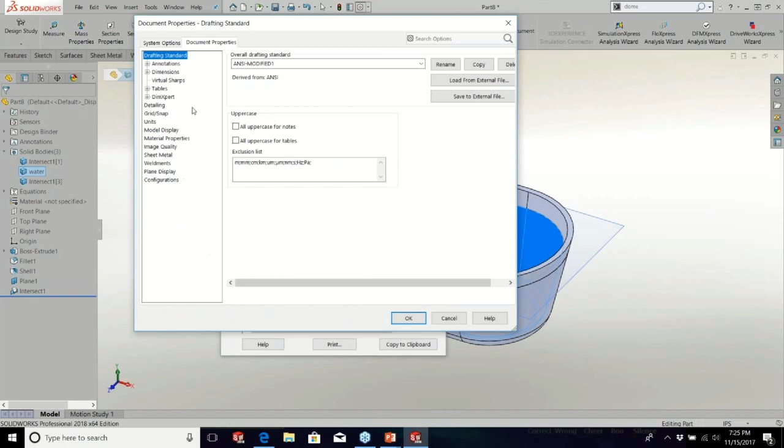Now I can take that water and find out how big my tub is. 15,000 cubic inches. This came to me in cubic inches. If that doesn't make much sense to you, it's probably because we need to change the units.

I'm surprised there's a lot of people that don't realize you can set gallons as a unit. So now if we recalculate, 65 gallons, which brings up an important question: is your water heater big enough? Well, let's find out. This one's going out to Jim Berry with the Northern Colorado SWUG. How do we find out? Well, we know it's 65 gallons. Let's say we have a 50-gallon water heater and we want this water to be blistering hot.

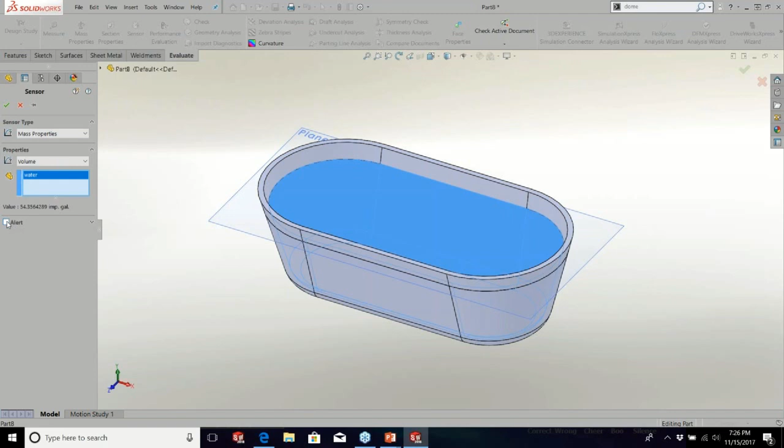Well, to tweak it, let's just add a sensor that will kind of keep tabs on this. So I'm going to set it for volume, do it for my water. Right now it's 54 imperial gallons. There's an SPR out right now, they're working on it. I set it for US gallons, but under the sensor, it's imperial gallons. It's fine. I'm going to say less than 42 — that's the answer to life, the universe, and everything.

All right, I'm going to expand sensors so I can see that total there. And I'm just going to drag this until my sensor goes off. There it is.

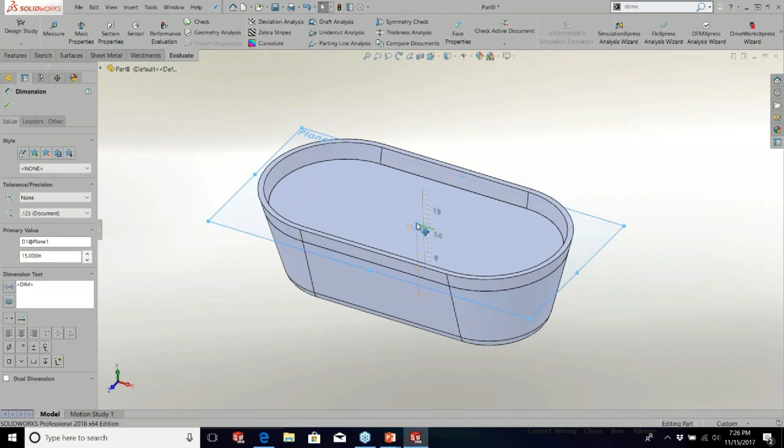So if I do a quick rebuild and grab my water, go to mass properties, 52 gallons. I could fine tune it here, but that gets me in the ballpark. That's a really quick way to find out. Little tip — I used that technique for the weekly power user challenge on the forums, and I won.

Not to brag, but I'm pretty proud of that. All right, tub's full of water. Let's make a drink, because you got to have a drink before you get in the tub. This one's going out to Jesse Vest with the Corpus Christi user group.

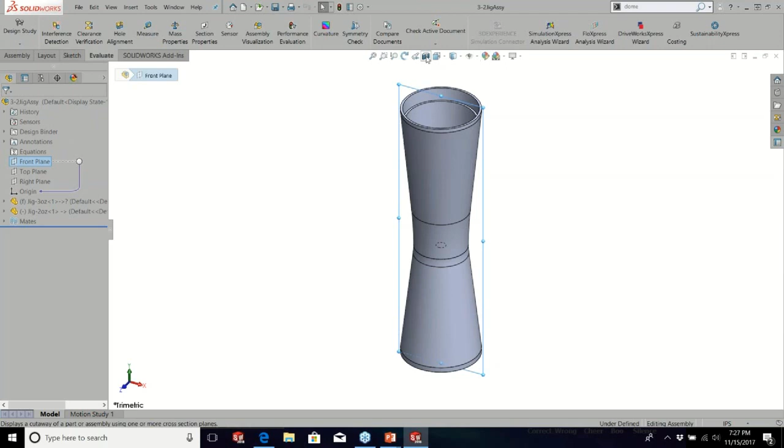I get to draw some really fun stuff. This should not comment on the crowd that I run with, but I was talking to somebody at a bar once and they said, hey, could you machine one of these drink measures for when they're mixing drinks? I would really like to have the 3-2, which is 3 ounces on one side, 2 ounces on the other. And what we were going to do is machine it so that there'd be a little ledge or lip, so when they fill it, they could easily see it.

How did I do that? Same way I did the tub. I'm just going to roll this part back here. Started with an extrude, created a volume, and what I did for this was I just made this shape, got it to an ounce, made this shape, got it to an ounce, made this shape, got it to an ounce, used combine to bring them all together, saved that part, inserted that part into the other part, did a combine to subtract it out. It's pretty easy.

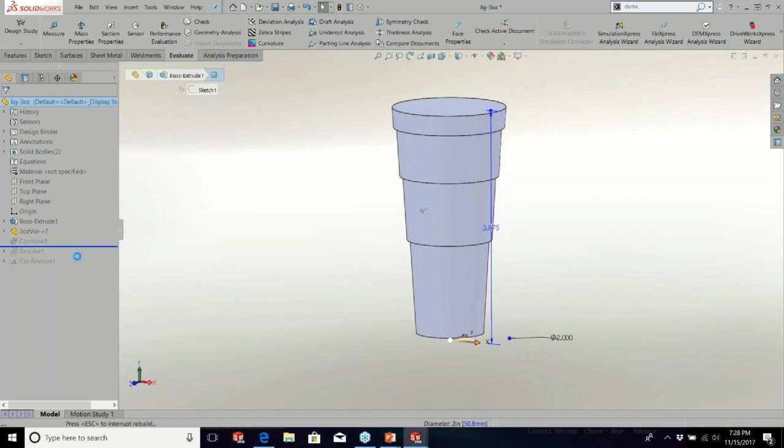All right, drain the tub, it's over — that's the last one. So this one's going out to the Minnesota SolidWorks user group, Mark Nelson up there. And how do we do something really cool like this? Let's find out. It's a lot easier than you'd think.

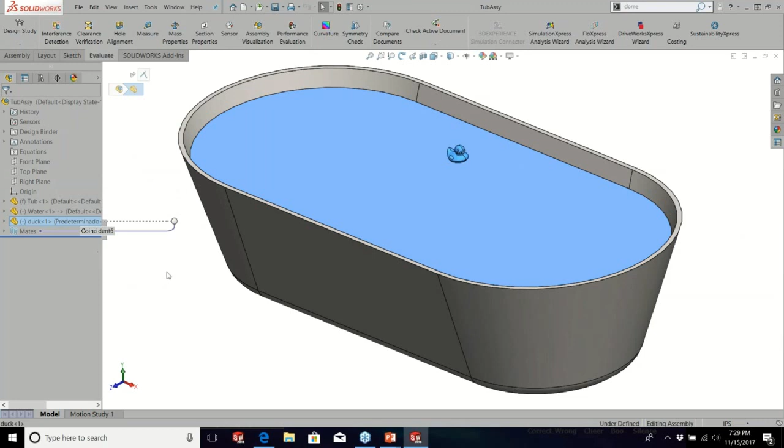So with this one, it's an assembly. The other one I did a part, but this one I have the tub is a part, the water is a part, and the rubber ducky is a part. It came from 3D Content Central, thank you very much. The water is based on the tub — I just drew it as a big rectangle, used an offset surface, and cut it with that.

So if I drag the water up and rebuild, it fills the tub. Drag the water down, rebuild. Did not mean to paste that there. Rebuild, fills the tub.

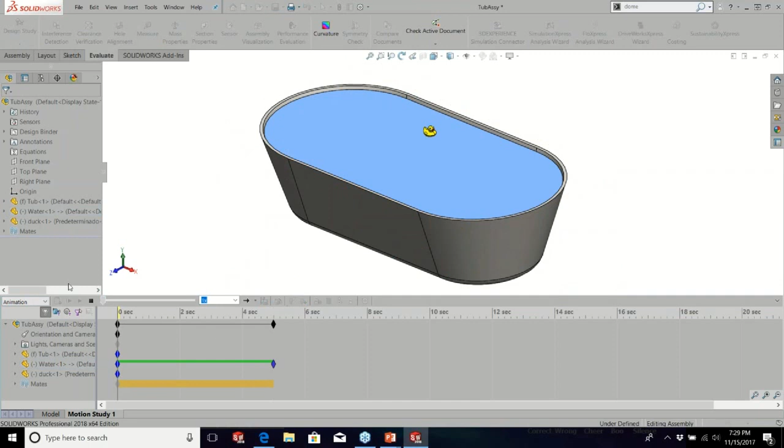So how do we make it drain? Let's go to motion study, move it out to about 5 seconds, drag the water down to where it's just about empty, calculate from start. And now we have a draining tub.

We can save that out as an AVI file, which is what I did for the presentation. Got to end on a fun note.